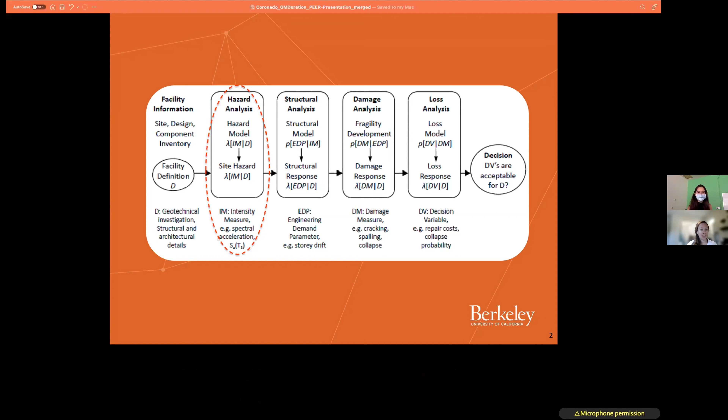Camila, do you want to say anything for your introduction? Yeah. Oh, you hit it all. Okay. Yeah, so Camila is going to jump into the hazard analysis and walk you through that. Camila, let me know when you want me to switch over the slides and everything. Perfect. That sounds good. Go ahead and go to the first one of my slides. You can go to the next one.

Okay. Perfect. So like Camila said, my name is Michaela Largent. I work with Jenny Watson Lamprey at Slate Geotechnical Consultants. Our portion of this project was to actually calculate the correlation between spectral duration and spectral acceleration. To do this, we took the intra-event residuals from 4 of the NGA West 2 ground motion prediction equations, along with residuals from 3 duration prediction equations listed here. I want to give specific thanks to Yousef Bozorgnia, Norm Abrahamson, and Jonathan Stewart for providing different components so that we could actually do this analysis.

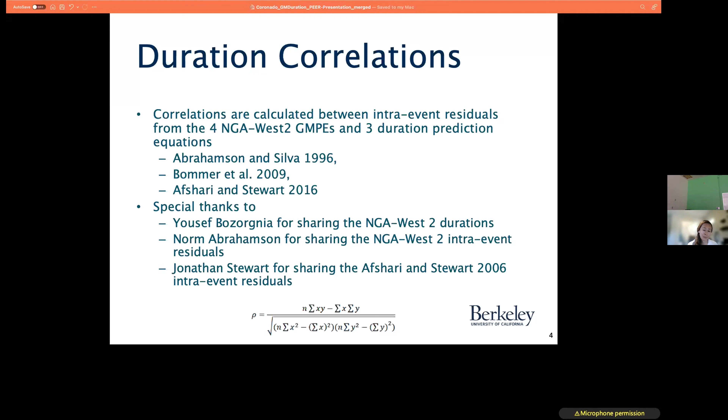So with these different residuals, we use the equation, the large equation at the bottom of this slide, to calculate the correlation coefficient. In this equation, n is just the number of samples, so number of ground motions that we looked at in the NGA West 2 database. X is the intra-event residual from the GMPE, and Y is the residual from the duration model. So then you can see our results in the next slide, Camila.

Of the correlation coefficient. So this is comparing the Abrahamson et al. 2014 GMPE with the 3 duration models listed in the previous slide. And you can see that there is a large correlation, specifically in shorter periods. There seems to be a stronger correlation with the 5-75 duration rather than the 5-95 duration. Specifically looking at the bottom graph, there seems to be a stronger correlation with the Afshari and Stewart 2016 model compared to the other 2 duration models. This is likely because we actually were given the intra-event residuals for the duration model rather than just calculating them within this study. So we use these correlations in the next couple steps, but first in the next slide, we walk through the hazard analysis.

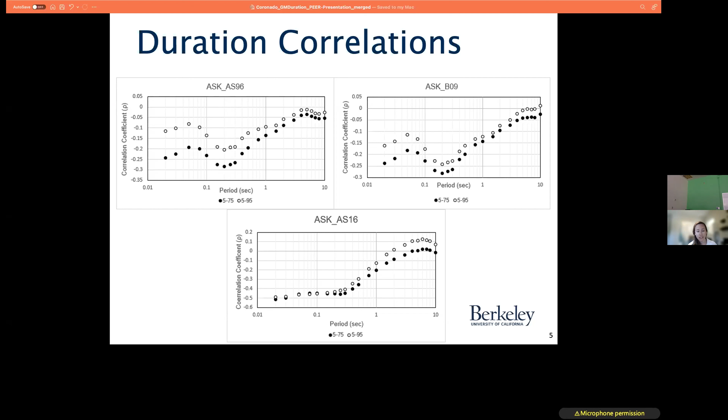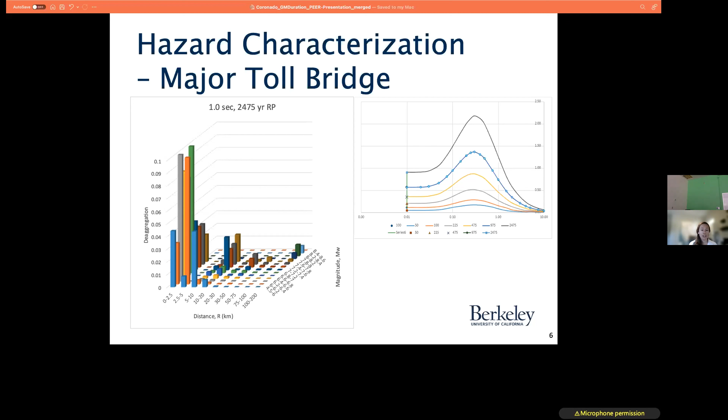So we performed a seismic hazard analysis for the Coronado Bridge and specifically concentrate on the 2475 return period. So that top uniform hazard spectrum in the gray, and also deaggregated the results so that we could find the mean magnitude and distance, which ended up being magnitude 7 at around 1 kilometer because the Rose Canyon fault pretty much goes right under the bridge. So using these seismic hazard analyses, we can then start to look at the actual correlation of duration to spectral acceleration in the next slide.

So this just walks us through all of the steps pretty briefly, and then I'll go into more detail in the next 2 slides. So we take that 2475-year spectrum and we scaled it with factors of 1 to 4.5. Then for each one of those spectrum, we find the epsilon value at 1.5 seconds, which was around the period of the bridge. We calculate the mean duration using that deterministic scenario that I listed in the last slide, so the magnitude 7 at 1 kilometer.

And that kind of gives us all of the components for this equation to calculate our new mean duration, this correlated mean, basically. And then we select time histories based off of this correlated mean rather than just the mean duration like we would typically do for a seismic analysis. So you can go to the next slide.

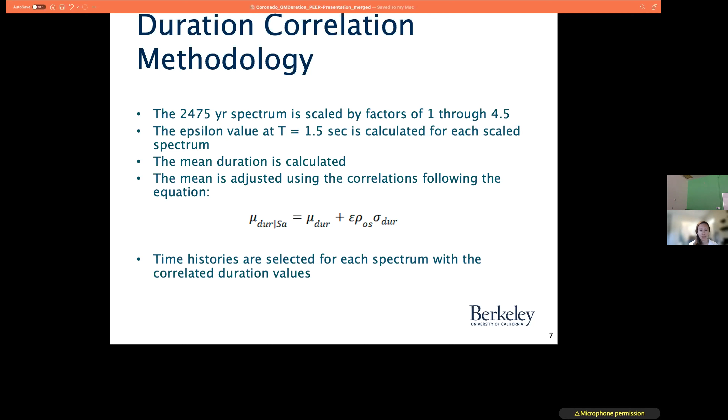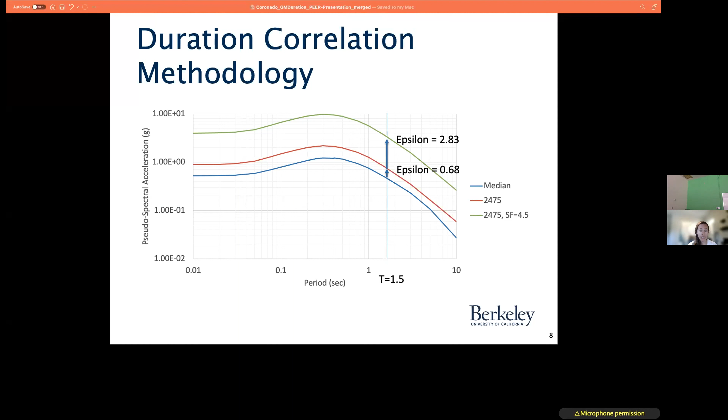So in this one, we're showing how we're calculating the epsilon. So the blue line is our median, so that magnitude 7 at 1 kilometer. And then the red line is our 2475 with a scale factor of 1, and the green is with a scale factor of 4.5. So then we calculate that epsilon just based off of how many standard deviations away from that blue line we are, and that gives us one component of that last part of that equation. And then in the next slide, it all comes together.

And this is my last slide, and then I'll pass it off to Camila. So we have the mean duration, which we just calculate based off of the deterministic scenario and the duration models. The sigma comes from the duration models. I think we're using the Abrahamson and Silva sigma here. The correlation was calculated using all of the ground motion database that we had in the residuals. And then each one of those epsilons gives us that last component, and we can calculate the correlated duration.

So you can see that it starts to change pretty drastically. So the mean duration originally calculated for the 5-95 was 12.8 seconds. And then when we scale the 2475 by a 4.5 scale factor, we get a duration of 11.2 seconds. So we selected different time histories than that original mean duration. So Camila was given 7 suites of 11 time histories to then go and develop her fragility curves. So I'll go ahead and pass that off to you, Camila.

Yeah, thank you, Michaela. Basically, as Michaela was saying, as we increase the intensity of the earthquakes, we can see a decrease in the duration of the ground motion. So for the structural analysis specifically, we were expecting to see reduced damage as we start to use these correlations. So first, I'll talk to you about our structural analysis.

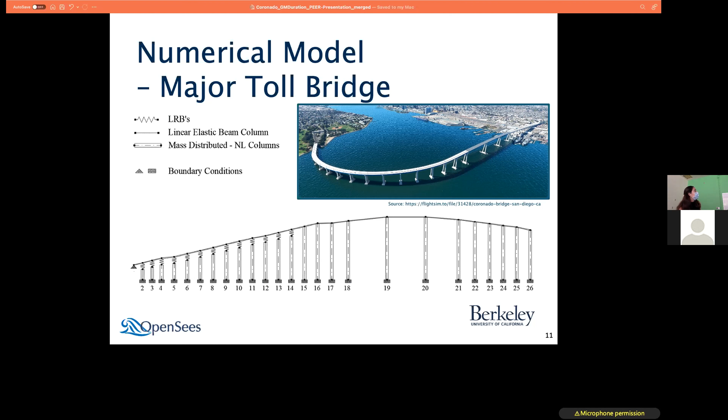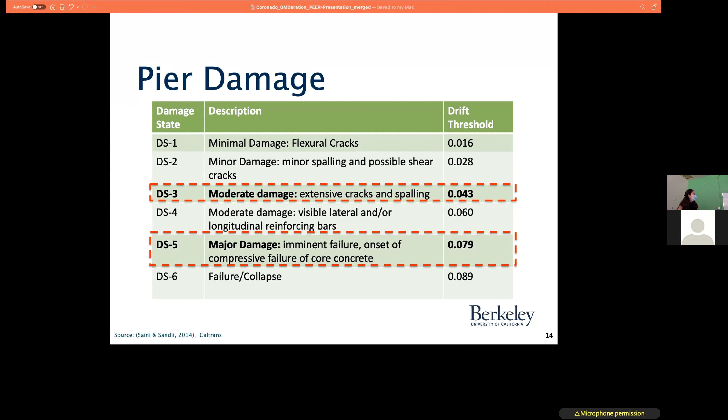So for the damage analysis, we looked into Caltrans and the Saini and Saiidi 2014 study, which is referenced in Caltrans, to come up with drift thresholds for damage states of the piers. Specifically today, I will be showing you damage state 3 and damage state 5, which are the moderate and major damage levels. And these are the ones that Caltrans typically uses to label bridges. For the bearing, we chose a single damage state, which is damage state 5 as a major damage level, and it's 235% because this is where we predict the buckling limit will be reached when we use the overlapping area of the bearing.

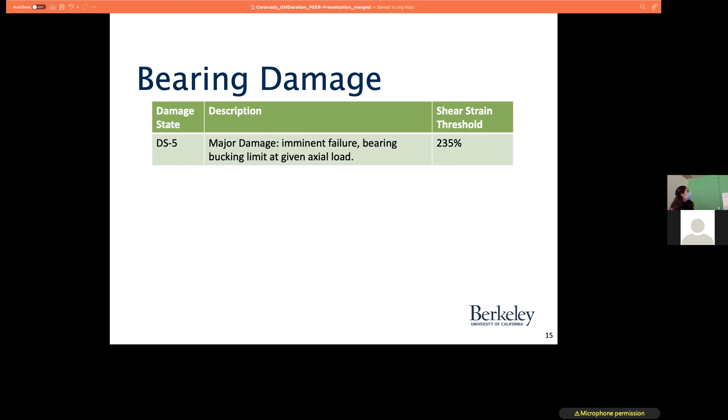So for the analysis results, I'll be showing you specifically Pier 14, but we came up with fragility curves for all of the piers in the bridge and all of the bearings. For ease of showing you the graphs, I'm just showing you one because this is mostly the controlling case, as it is the most flexible pier that has an isolator on top.

So for Pier 14, and this is with the non-correlated ground motions. You can see damage state 5 and damage state 3 for this pier, and the distribution for all the other piers is very similar to this one. They're just shifted to the right.

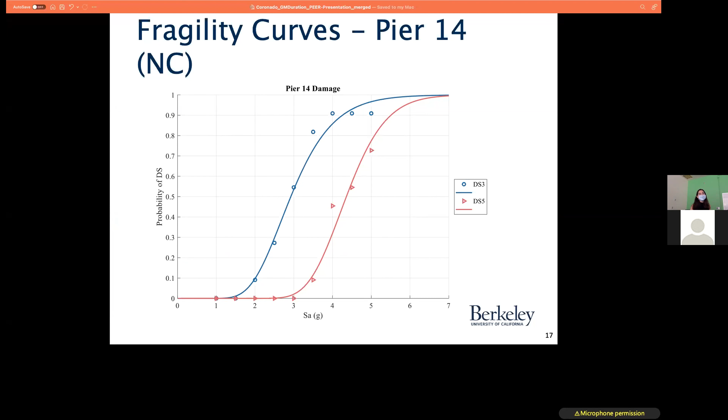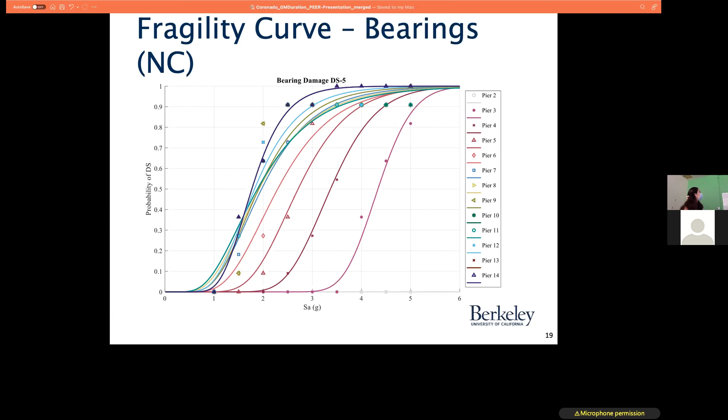For the bearing, this one was easier to show you since we have a single damage state. You can see the distribution of all the bearings on top of Pier 2 to 14. And as you can see, Pier 14, which is the purple one, mostly controls when it's above the median. Below the median, we see some of the other piers starting to control, but it's very few, so we're still showing you mostly Pier 14.

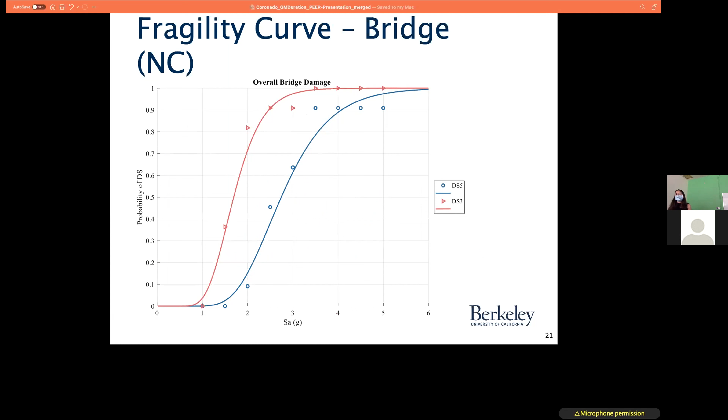For the overall bridge, in order to come up with the damage states, damage state 3 is really controlled as the maximum of all the piers in the bridge. And for damage state 5, it's the maximum between the piers and the bearings damage states.

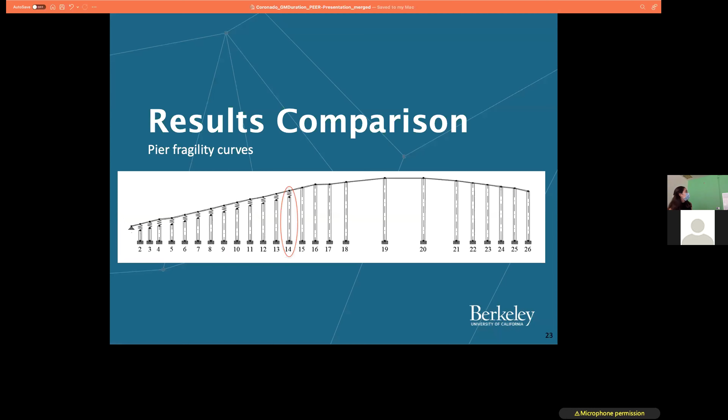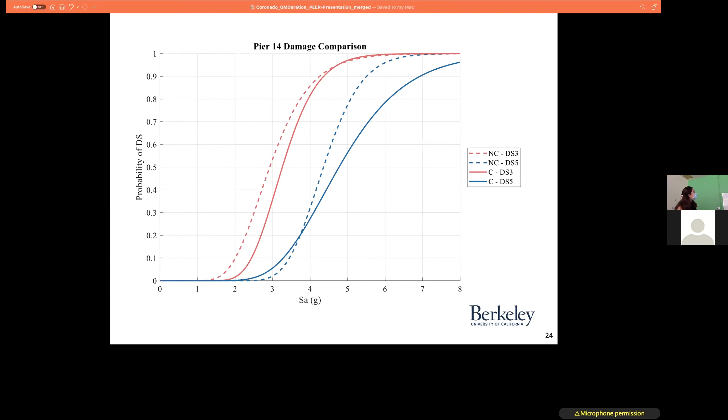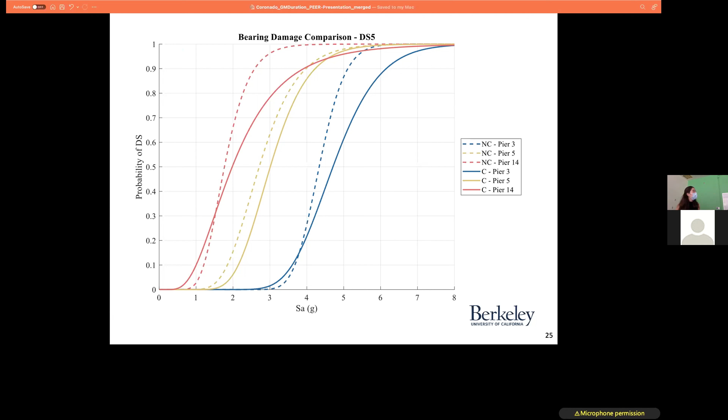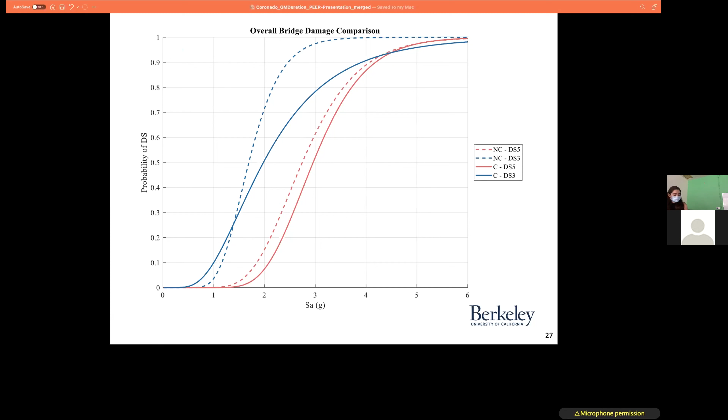So in conclusion, if we don't account for this correlation, we might be overpredicting the durations, as Michaela said. And also, when we account for the ground motion correlation in the analysis, we see that the median damage level occurs at larger intensity values.

For future work, to complete the PEER PBEE framework, I would like to add the loss analysis. And also, we are planning to repeat the analysis for a typical highway overpass that's smaller than the Coronado Bridge, and see how those results come up and compare.

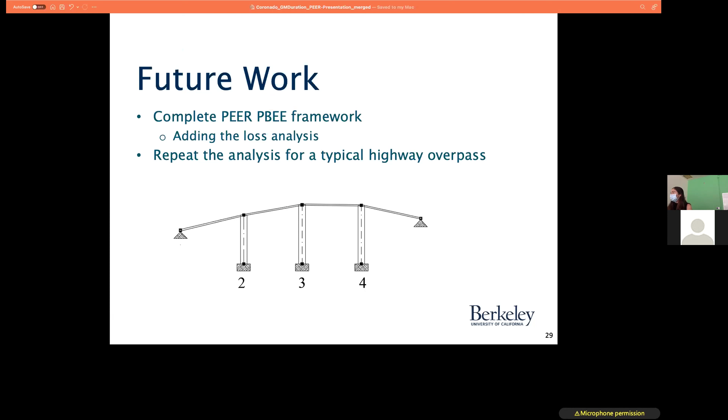And also, we're using the same model that I used for this presentation for the Coronado Bridge to do a hybrid simulation test with a lead rubber bearing. We're testing in the lab, and we're specifically looking at the rotational behavior and using the data for updating the numerical model of all the other bearings and putting that into the analysis.

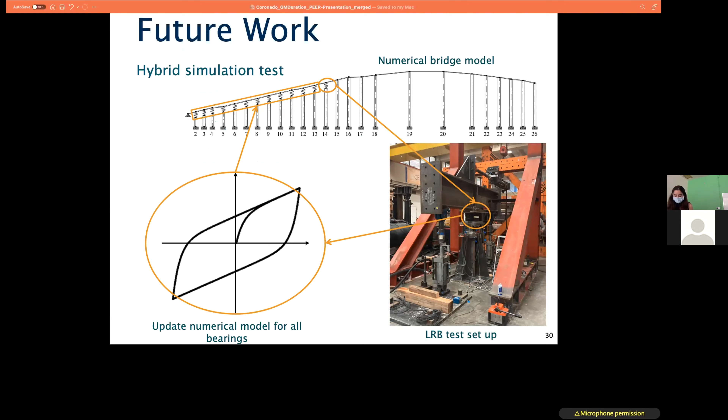And with that, I'll take any questions you might have. Thank you. Do you have any questions? Yeah, let's go there. Thank you.